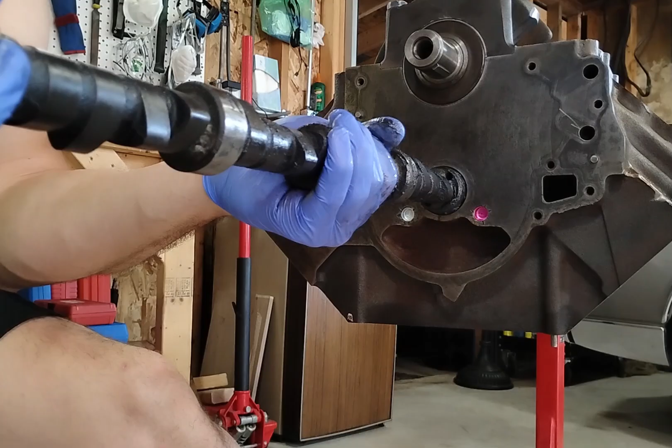In our last episode, episode 4, we battled some serious challenges just getting the camshaft installed. After plenty of finagling, we finally got it in. Now in this episode, we're hunting for true top dead center to figure out which of the 2 timing marks on our mystery Chinese damper is actually correct. And just wait until you see what we discover.

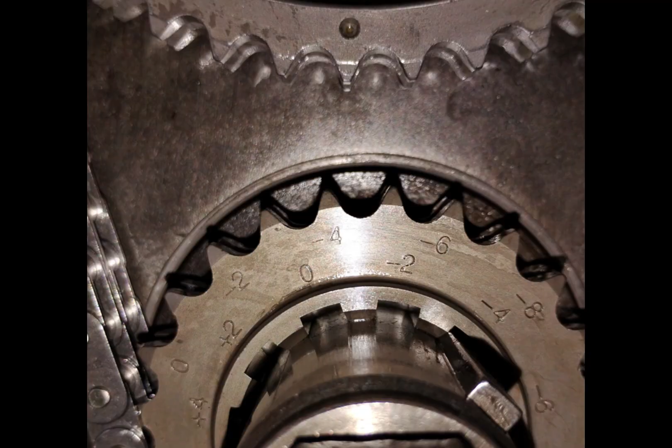From there, we move on to degreeing the camshaft, but the numbers we're getting are all over the place. Nothing wants to cooperate. And if that weren't enough, we run into yet another hurdle, figuring out the right pushrod type and length. It's unbelievable. So yes, the struggles continue. Stick with us to see how, and if, we manage to sort out this latest round of problems.

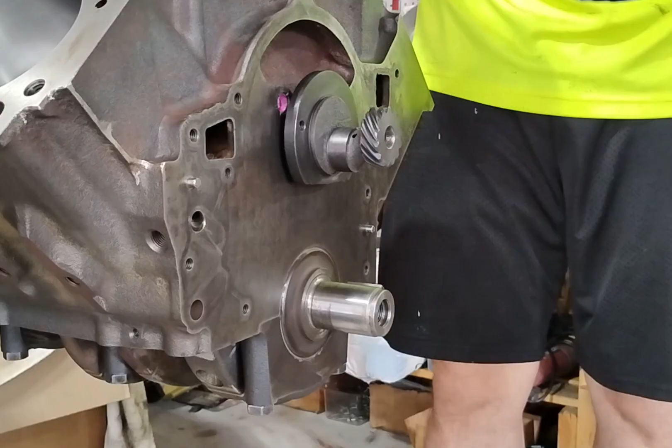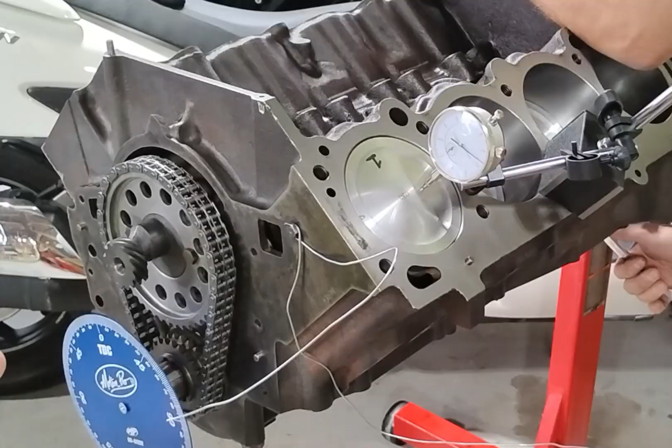We've got the crank, rods and pistons in, and the camshaft is in, so now it's time to install the timing chain set and degree the cam. The next step is to degree the cam. I'll be honest, despite building many engines over the years without a single issue, we've never actually done this process before. And there are plenty of great videos out there explaining the how-to of the process, so we're not going to get into technical details here. You can find those videos on your own, but we will tell you why you should care.

Given the fluctuating quality of modern parts, we were strongly encouraged to degree this cam, and it's a good thing we did. We purchased a timing chain set featuring multiple index positions specifically to dial everything in perfectly. However, when we started with the 0 offset position and measured the lift, the numbers didn't match the index marks on the crank pulley. Confused, we remeasured and got the same results. To make a long story not so long, we tried nearly every clocking position in this set. Even when we finally found a position that got us close, I still felt uneasy.

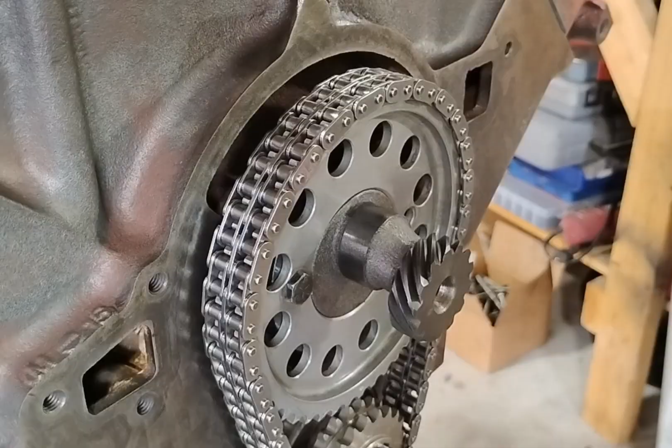So we called the supplier, TA Performance. Now they're not the manufacturer, they're the supplier. And we spent 45 minutes on the phone with a very helpful expert. And after reviewing our steps, he agreed we were doing everything right. The numbers just didn't make sense. Our conclusion? The parts were manufactured incorrectly. Had we simply lined up the dots and trusted the sprockets, we would have been screwed. The engine would have run terribly, and we would have been left scratching our heads as to why. So if you've never degreed a cam before, take it from us. With today's parts, you'd better start doing it.

Now that we got the camshaft dialed in, we're applying some Loctite primer to the threads in the cam, as well as the bolt threads that hold the cam sprocket on. I'm going to let that dry a little bit, then apply some red Loctite. We're also going to bias the cam gear in such a way so that if those bolts should ever loosen up, that cam gear is in the right spot anyway. But with the Loctite, nothing's going to move. That's a good practice to do.

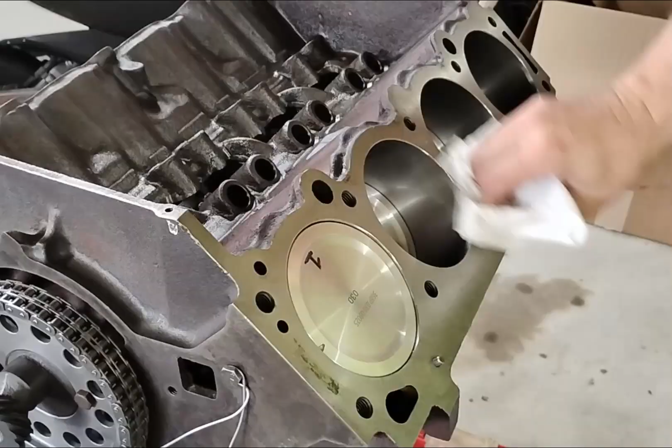So we're now cleaning the block in preparation for the cylinder heads. It's critical to strip away every trace of oil, grease, or old debris from the mating surfaces. A pristine surface is the only way to ensure the head gaskets achieve a permanent high-pressure seal. We follow the exact same process for the cylinder heads, double-checking the surfaces before carefully lowering the heads into position onto the block. Unlike many modern engines that use one-time stretch-to-yield fasteners, the original Buick 430 head bolts are reusable, provided they're in good condition.

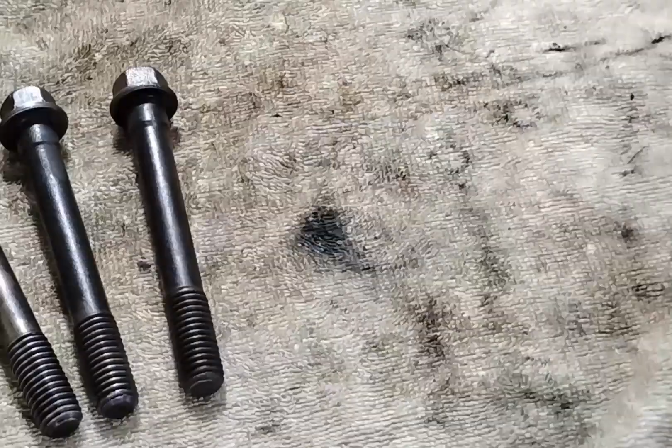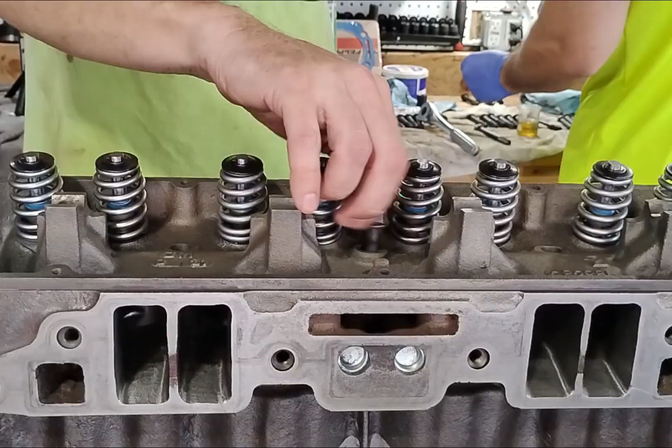We're using a wire wheel to strip away any corrosion and ensure the threads are pristine. This is a critical step because dirty or rusty threads will create friction that leads to false torque readings, which can compromise the clamping force and lead to head gasket failure. Apply a thin coating of engine oil to the head bolt threads to lubricate them, but don't slather it on because excess oil will drip off and get between the head and the block, and that will compromise the head gasket.

We're torquing down the heads in 3 steps following the tightening pattern described in our manual. Tightening in 3 steps prevents the head from distorting. The final torque we're using is 120 foot-pounds. So we started with about 50 foot-pounds, then went to 80, and then to the final 120, each time using the tightening sequence as described in the manual.

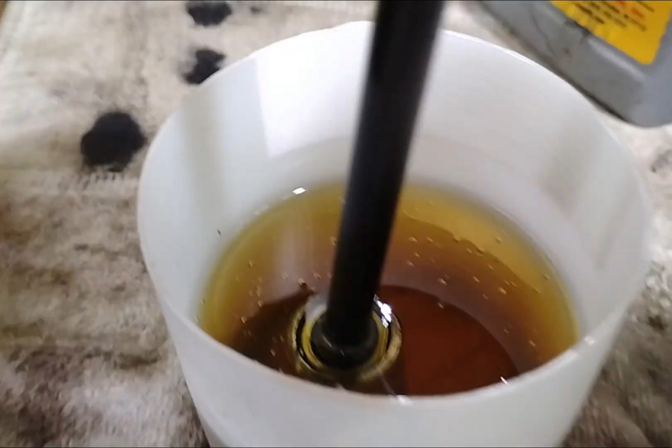Now that we have both cylinder heads bolted down and to the correct torque, we're going to now pump up our lifters. We are using hydraulic lifters. They need to be pumped up with oil prior to installing them because you don't want to start these up dry. Once they're primed up with oil, we're popping them in one at a time into the lifter bores. We're also going to make sure that the camshaft is lubed up again with some more moly because we want to make sure we have a good amount of lubrication for startup.

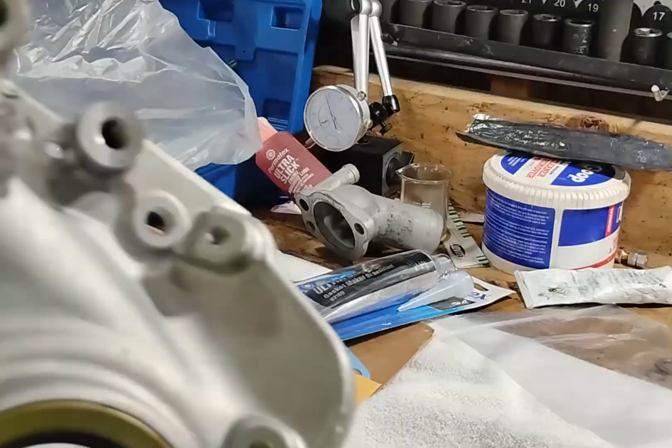So now we're cleaning the block in preparation for assembling the timing case. We want to make sure that the block is clean and free of any oil. Contaminants like oil can cause your gaskets to leak, so make sure you clean things really good. We're also applying some assembly lube to the timing chain and sprockets to make sure they have some lubricant on them for the first startup. We don't want moving parts dry during first startup. That is not good.

So we installed a new crank seal to the new timing case. And we're using a new timing case because this is a known weak area for these Buick engines. The oil pump is actually part of the timing cover, and since this is all aluminum, they tend to wear over time. Using a timing cover that is nearly 60 years old is risky, so we decided to replace it.

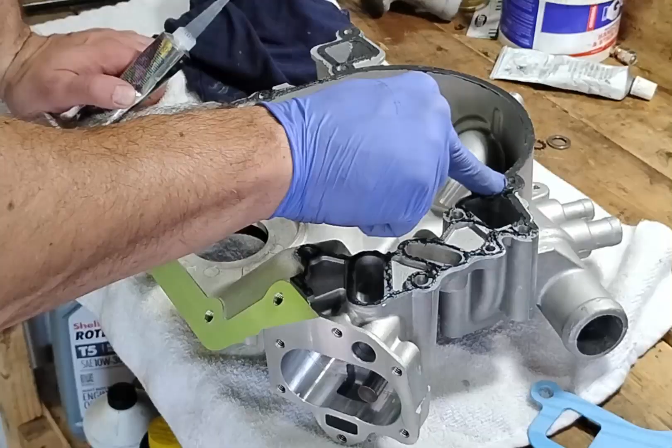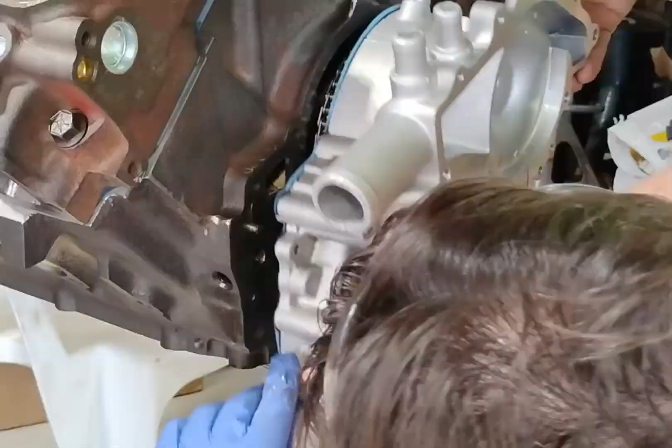We're cleaning off the gasket surfaces again to make sure they're clean, and we don't like relying 100% on the gasket for proper seal, although it probably would be fine. But we always put a thin layer of gasket maker where the gasket goes just to make sure things seal up good and tight. So before we put the timing cover on, we're going to lube up the eccentric on the camshaft where the fuel pump actuating rod or lever rides, as well as put a little bit of moly lube on the gear that drives the distributor.

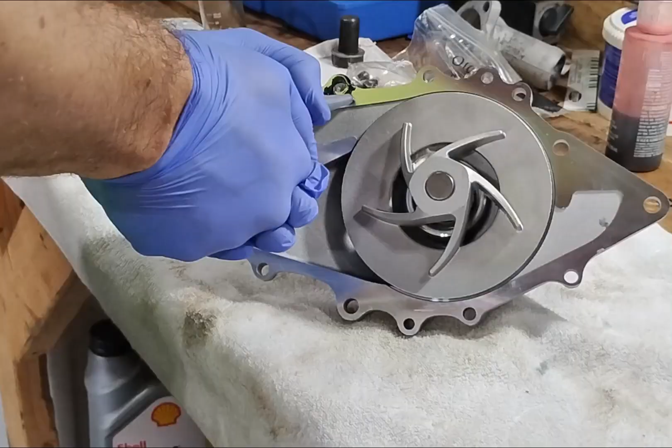Now we're torquing down the timing cover following the service manual pattern, and again we're using a stepped approach to torque everything down to their final values. Now that the timing cover is on, we're going to repeat the process of cleaning and applying gasket maker and gasket to the new water pump, and also torquing that down to its correct specifications in a stepped approach and following the recommended pattern for tightening as laid out in the manual.

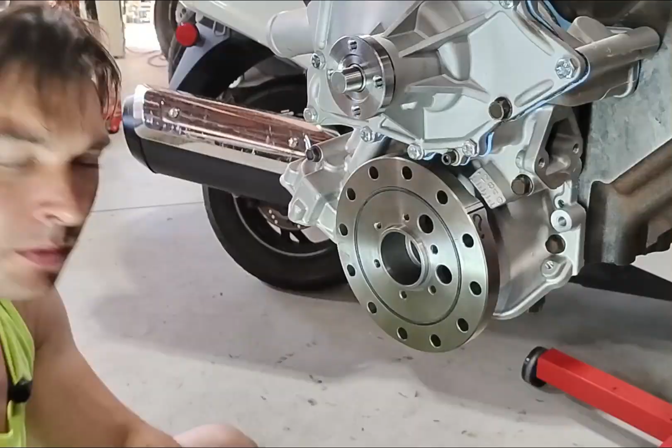Now it's time to put our damper on the crankshaft. We take out the bolt that we had been using to help us spin the crank during assembly processes, and we also put a little bit of lube on the ID of the damper, where it mates up with the crankshaft, to help things slide on, because these fits are typically very tight, very snug. You don't want that slopping around. And you also want to put a little bit of lube on the OD of the damper where it contacts the crankshaft seal. You don't want to install that dry. Could damage the seal. Everything works better with a little bit of lube.

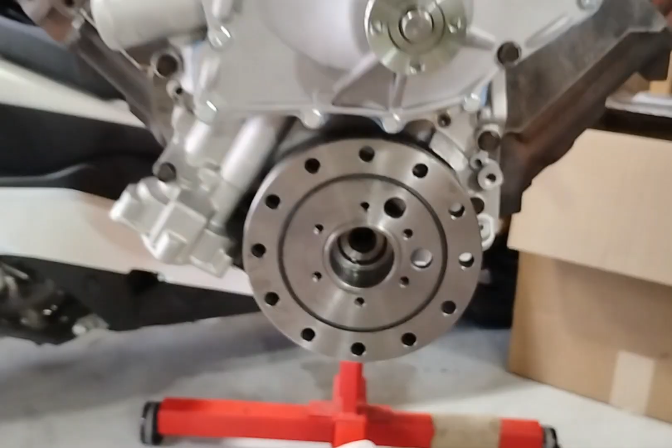We are ready to put on our harmonic balancer, and we're looking up the torque for that. Harmonic balancer to crankshaft, we are looking at 200 foot-pounds minimum. Yeah, that's quite a bit holding that puppy on. Luckily we got a torque wrench that goes up to 250. So we apply a little bit of engine oil to the threads of the crankshaft bolt that holds the damper on, to make sure it's lubricated properly. Again, if it's dry, you may get false torque readings, so it's always good to have a little bit of lube on there.

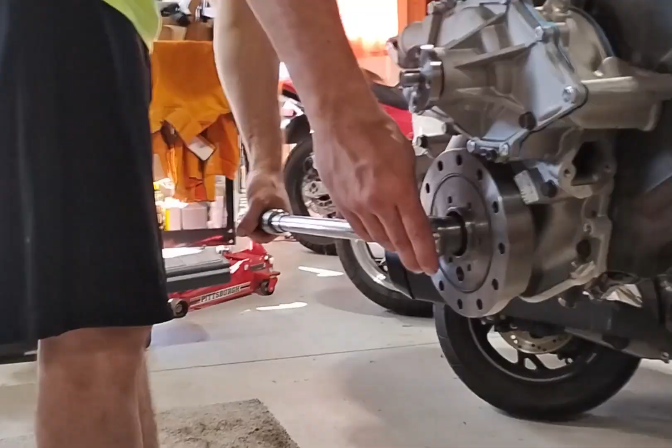Now we're getting ready to torque the damper on, but I'm not happy with pushing down on the torque wrench. That engine is really heavy, and now we're going to be pushing another couple 100 pounds down on top of that. So I said, you know what, let's switch it around. Let's go around the other way and lift on it. That way we don't risk dropping the engine.

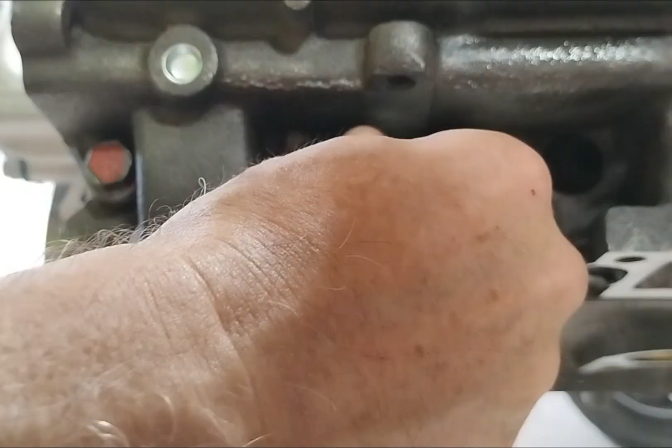Now we're getting ready to find true top dead center for our number one piston. To do this, you use a tool called the top dead center piston stop. It's a simple mechanical tool designed to physically block a piston's upward travel so you can find the exact center of its stroke. It's essentially a hollowed out spark plug with a long bolt or rod running through the center. Most are made of steel or aluminum, this one's brass, and some use plastic tips to prevent scratching the piston head. This is the most common type for amateur mechanics. It threads directly into the spark plug hole of your number one cylinder. There are other types, but this one will do just fine.

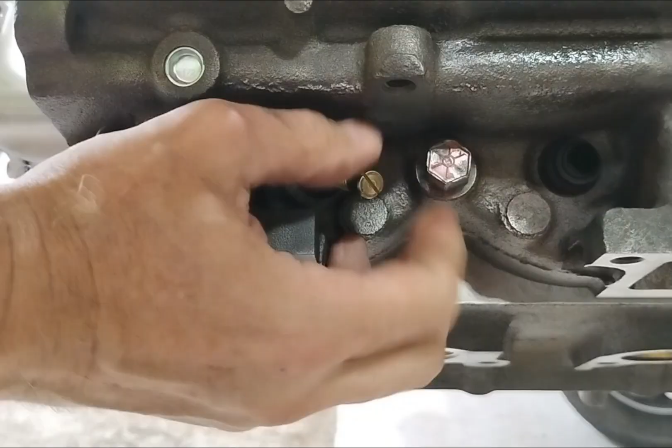Because we can't see the actual tops of the pistons because the cylinder heads are on, what we're also going to do to make sure we got things right is check cylinder number 6, because when piston number 1 is at top dead center, piston 6 on this engine is also at top dead center. It's not the same point in the combustion cycle, but that's okay, that doesn't matter.

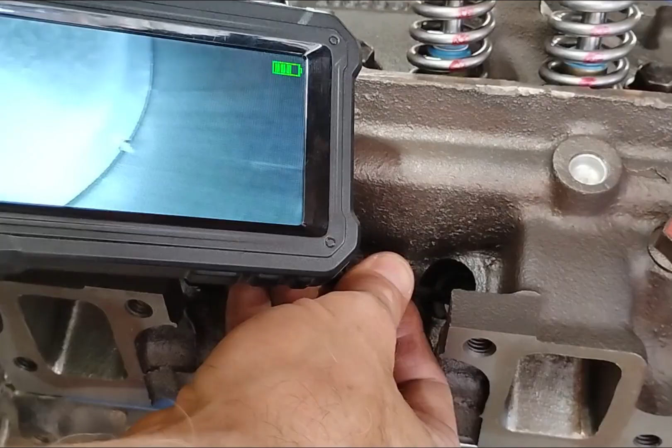So what we're doing is we're taking our endoscope here, which is basically a camera with a flexible mount at the end so you can put it down into small tight areas and see what's happening. And we're going to watch for the top of the piston to come up near the top, and that will tell us that we're close to top dead center, which will also be top dead center for number 1. Then we'll rely on our top dead center tool for exact measurements.

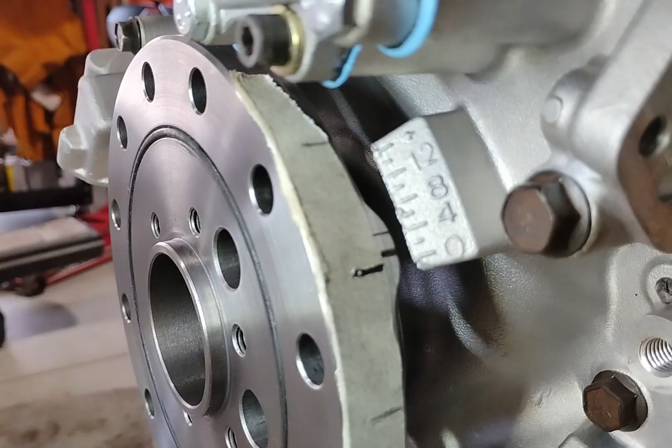So here we are, we got the harmonic damper put on. I want you to pay attention to what we're seeing here. This mark here is one of the engravings on the harmonic damper from the factory. It's deeper and thicker than this mark. That is another mark on the harmonic balancer from the factory. So there were 2 marks.

As our machinist pointed out in our episode 2, he saw this on the damper and said he doesn't know which one's right. And there's no way to tell until you get the damper on the motor. So it turns out neither of them is correct. What we had to do was get a piston stop for number 1, and this mark here and this mark down here are the extremes of the piston travel. So halfway between those is this mark. That is true top dead center.

And we have it now lined up with the 0 on our timing case cover, so we know that is correct. What we're going to do is take this masking tape off of here. We have a degree timing sticker coming in for this balancer, and we'll put that on. But in the meantime, we've put a little bit of a dimple in there with a sharp punch, as well as on the face, so that we don't lose this mark anymore.

But this really stresses the importance of you cannot trust parts anymore, even from what was maybe a reputable company in the past. If things are made overseas, sorry, China, but you know, this is what you get. It's not right. You have to double check everything. This could have caused us some major problems had we just assumed everything was correct. So be forewarned.

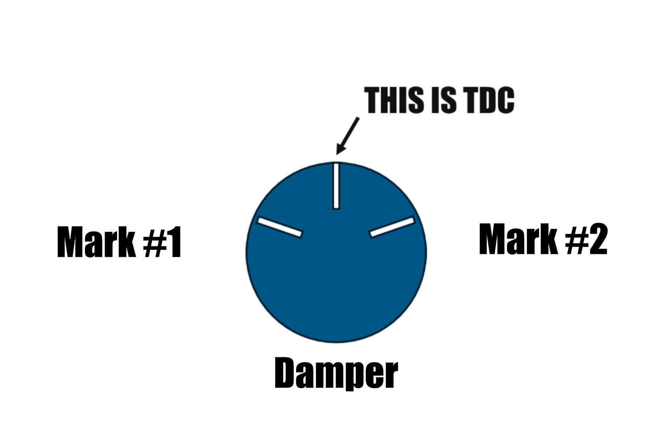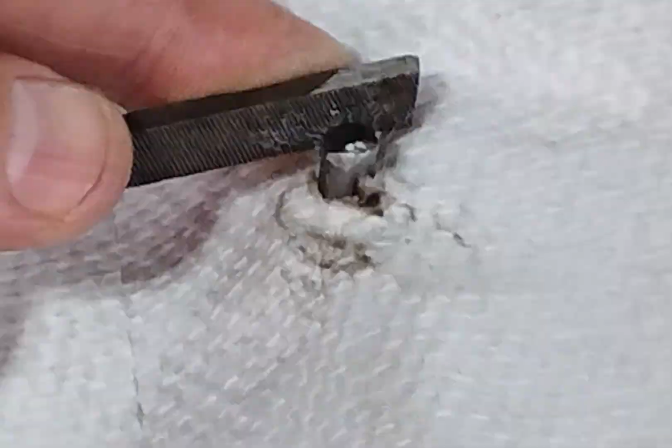So what we're going to do is clean that off. We're going to obviously protect the engine from filings getting into the valley pan. But we're going to file that down, make sure it's round, smooth, the right diameter. Otherwise, the intake manifold won't go on.

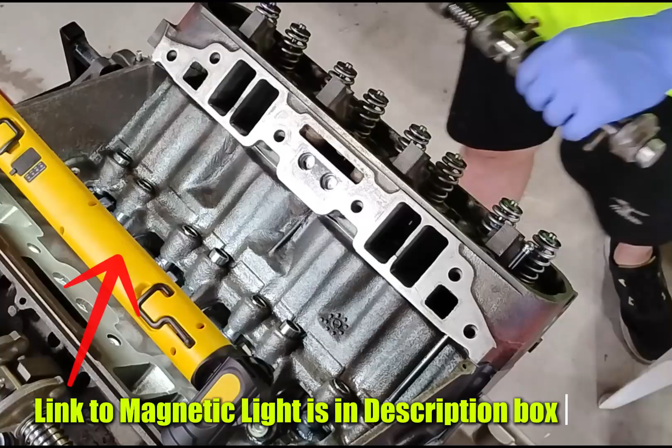To determine the correct pushrod length, you'll need an adjustable pushrod tool like this one from T8 Performance. This tool features a threaded body that allows you to precisely dial in the length. What you want to do is set the camshaft, so rotate the engine until the camshaft is on its base circle, fully closed, for the specific valve you're measuring. Place the adjustable pushrod into the block, ensuring it is seated correctly into the lifter.

Assemble the rocker arm assembly over the pushrod and torque the mounting bolts to factory specs. Lengthen the tool or shorten it until all vertical up and down play is eliminated between the lifter and the rocker arm. You have now reached 0 lash, when you can still rotate the pushrod with your fingers and feel a slight drag, but there's absolutely no vertical movement.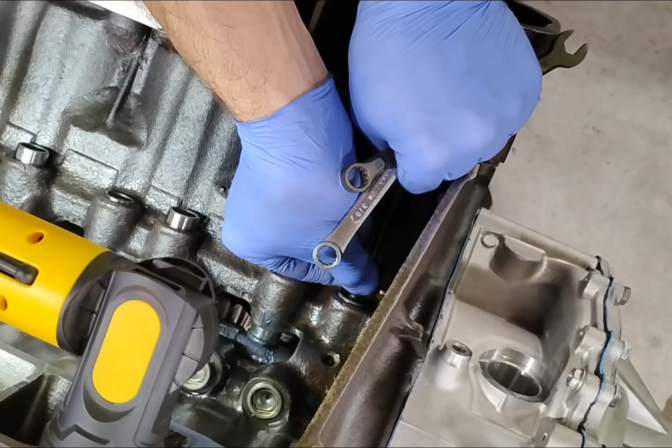Carefully tighten the jam nuts on the tool, but be careful, the threaded ends often want to spin as you tighten them. If the length shifts even slightly, you must start the process over to ensure accuracy. Carefully disassemble the rocker arm and retrieve the pushrod. Then measure its total length with a high-quality caliper. Document the exact measurement for that specific valve.

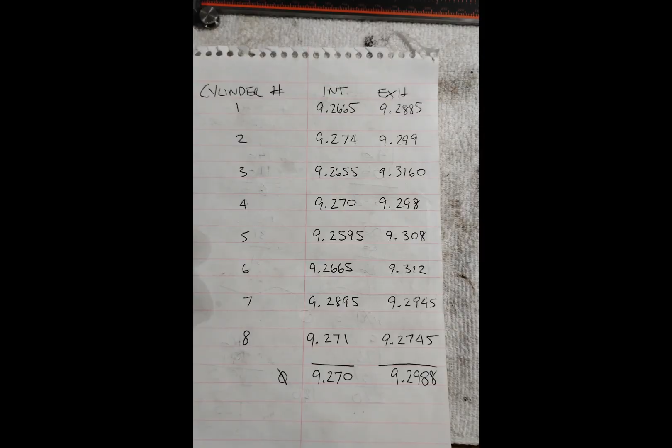Because Buick valvetrains can vary slightly across different cylinders, keeping meticulous records is vital in order to avoid mixing up your numbers. Due to the machine work, altering the height of the deck and the heads and a new camshaft, we can't use the stock pushrods. So we measured what lengths we need, and over here on this chart, we have our intake and our exhaust. What the pushrod length is at 0 lash, and we're targeting 40 thousandths to 60 thousandths preload.

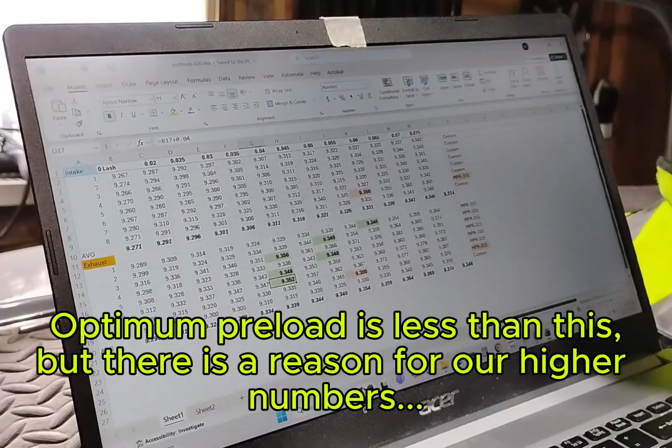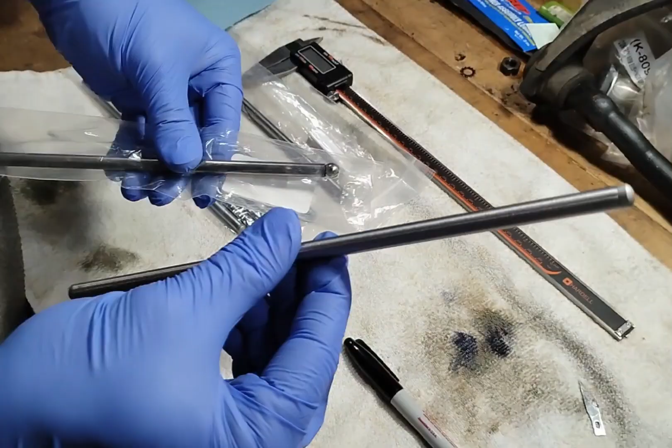And we needed custom length pushrods for almost all the intakes and one of the exhaust, and found some Melling pushrods that would work with the rest of them. Now if we look over here, they look a little bit different, but these are the custom length ones. These are the Melling ones I got off of Summit.

Explain some of the challenges we had with online data. Yeah, the measurements weren't quite right. And when it comes to pushrods, 3/8 and 5/16 sometimes is not 3/8 and 5/16 in terms of diameter and ball end tip. I had to take a few back. It's easiest if you just stick to a stock rebuild and a stock cam, but you can't really do that. You have to measure to make sure these are the proper length, and don't trust what they say, even from the manufacturer. On some sites, it was all wrong measurements, wrong length. So yeah, wrong ball diameters, everything is suspect. You have to double check everything yourself.

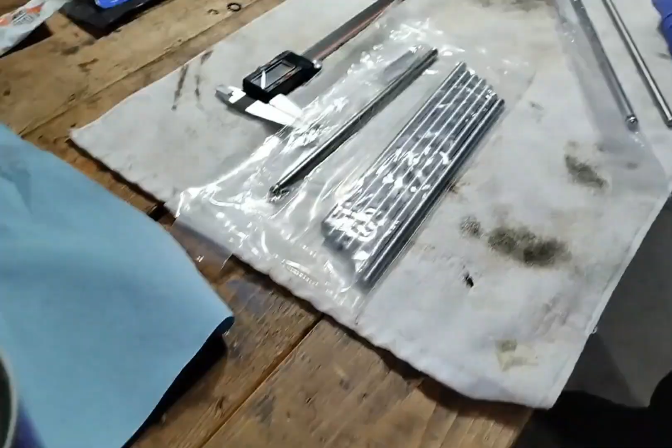For the 430, it oils differently than the 455. And we need non-oiling pushrods because the 430 accomplishes its oiling through passages in the block and into the head that pressurizes the rocker shaft and then drips down to the lifter. The 455 is different. And I did not want to use a hybrid adjustable pushrod. I'd rather use a one-piece. So this is what we've got to work with here. So let's get measuring and see if these will work, and we can finally button up the top end of the valve train.

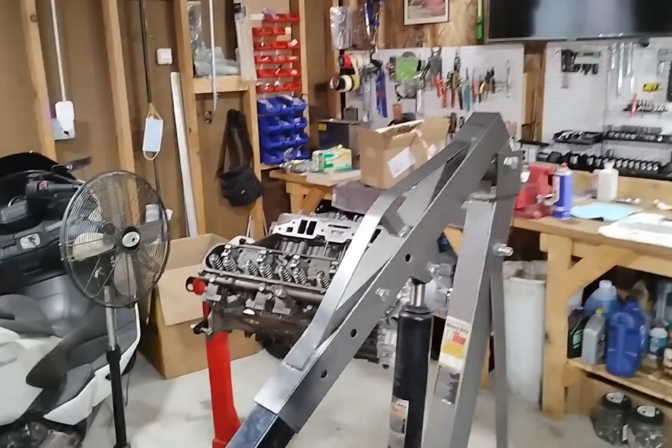So I guess to summarize, because of the differences in the heights of all these pushrod lengths, we were not able to utilize one stock length, right? We have several lengths that we had to use just because, again, there's Chevy valves in these heads. They open up the breathing a bit more. And we're just not entirely sure if perhaps the valves are not all seated consistently height-wise, where the machining, where the seats are. We just don't really understand where the discrepancies are coming from, other than there are some.

So we had to do a little bit of, actually quite a lot of research on lifter lash, lifter plunger travel. We tried to use AI tools to help us out, but that didn't work too good. We had to really come up with our own numbers. And yes, we know 20 to 30 is the ideal lash, but in this case, we have to go with something a little bit bigger. Turns out the lash on these, or I should say the piston plunger travel on these lifters is 120 thousandths. Is that right? I believe that's correct.

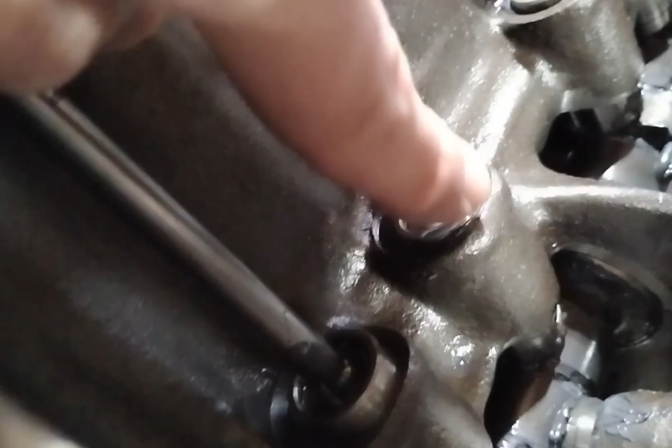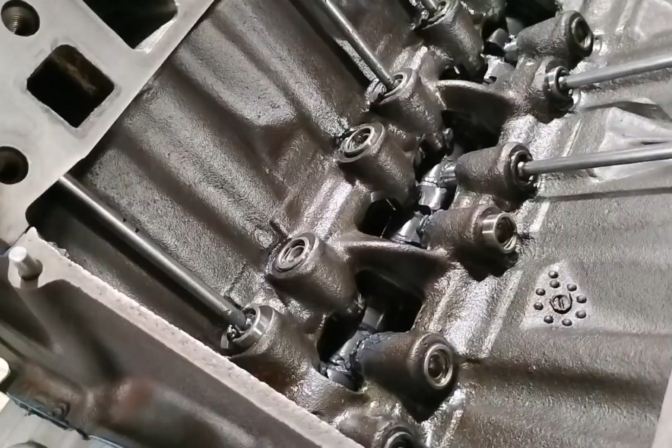So from the point where that lifter is fully up against its retaining clip, pushed all the way down, those plungers travel 120 thousandths. We wanted to stay away from the very top of the plunger travel and the very bottom of the plunger travel. So that's why we focused on the lash settings that we did. That gives us quite a bit of clearance at the bottom and quite a bit of clearance at the top, and it helped us reduce the number of custom pushrod lengths required. So this is the best scenario we could come up with, and we're confident it will work.

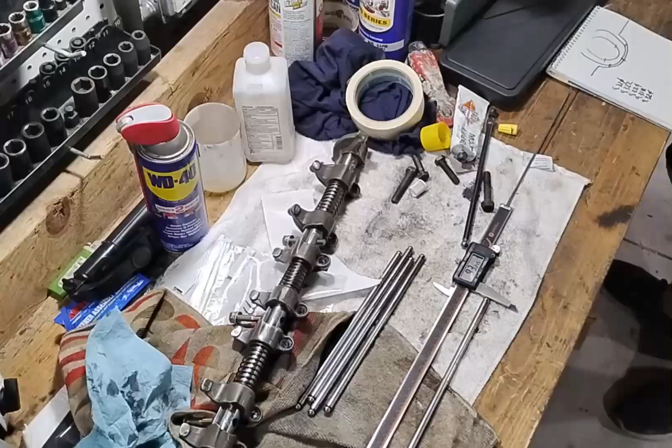So now we're measuring all the pushrod lengths that we got. And remember, there's a variety of different lengths for the situations that we have here. So we want to make sure, first of all, that they're correct, that they're what we ordered.

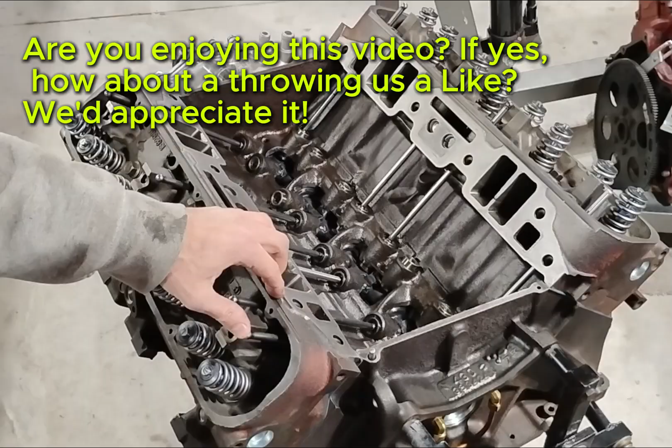And if they are, we're going to write down the exact length on those pushrods, and then compare that to the spreadsheet that we have, which shows which length pushrod needs to go in which position. In other words, pushrod number 1 may have to be the exhaust valve for cylinder number 3. That's how specific things have gotten in this particular engine build. But, you know, that's what we got to do. So, again, we're being very careful about how we're doing this, and we're making sure that we're getting the right pushrod in the right location.

Once we have all the pushrods in their right places, we are putting on the rocker arm shaft assemblies for both sides, lubing up everything again as we go, and torquing them down to factory specs.

Once the rocker arms are on, we want to give the engine a rotation or two, make sure everything feels good, there's no binding. We double check each of the pushrods to make sure there's nothing loose and flopping around. And again, don't forget to take that top dead center piston stop out before you do any kind of engine rotation.

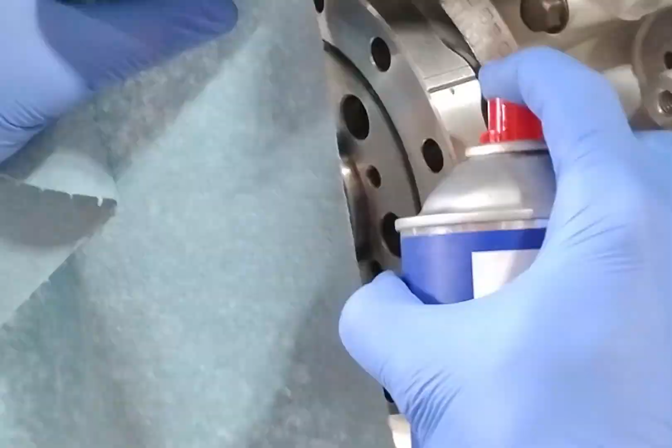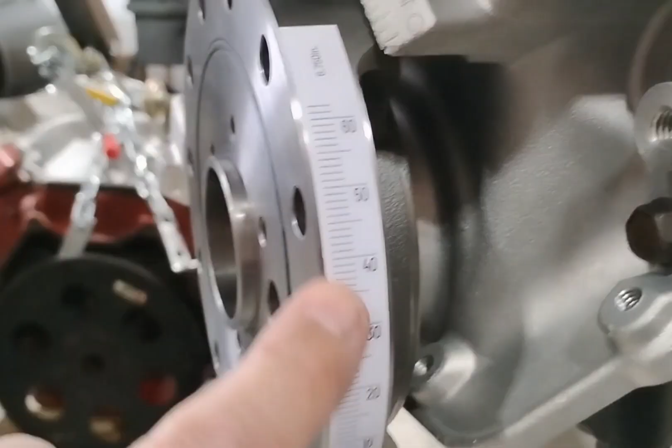Now we're going to take off our temporary masking tape, which helped us determine top dead center, and clean off that damper nice and clean and put our beautiful new degree sticker on there. We want to make sure that we line up the 0 ticker on that tape to the punch mark that we made on the damper. Very good. So our new sticker's on there now. We got all sorts of markings on here. We'll be able to time this thing no problem. And we got the true 0 mark lined up with our dot. Perfect. Feel much better about that.

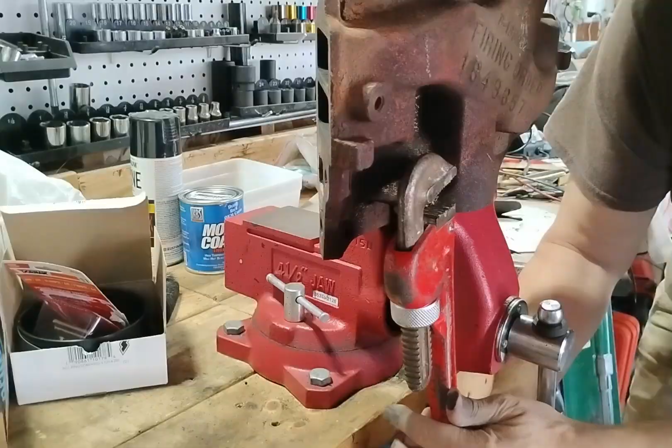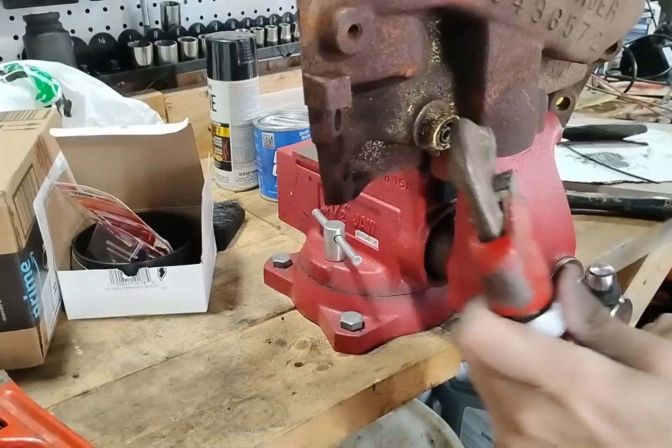So, as is often the case with old cars, parts that have been joined together years or decades ago sometimes like to become one with each other, and they get seized in there pretty good. So here we are with our stock intake manifold, and there's a water temp sensor that just will not come out. We've struggled with this thing, we've tried heating it up, tried a pipe wrench on there, because the sensor itself is brass, it's very soft. The tool that goes on there just mangled it. Vice grips, you name it, it just wouldn't come off.

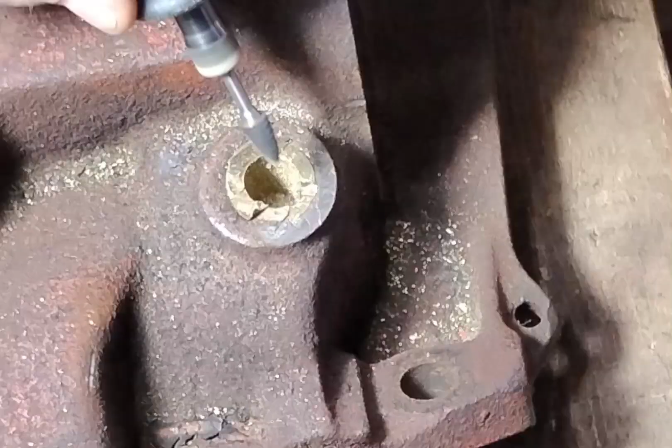So we had to eventually just cut the thing off and use a Dremel tool to carefully grind away the ID of the sensor, and that way we could collapse it a little bit and break it free and get it out of the manifold.

Here I am doing something a little bit dangerous. I don't have any gloves on. I'm old school. I just don't wear gloves. I feel they're a pain in the neck and they just get in my way all the time. But I suffer the consequences quite often. I cut myself all the time. My son actually makes fun of me. He says, "Hey, let's see if that's sharp. Dad, run your finger across that and see if you get cut." Because I do that. So just be careful when you do this kind of stuff. Don't do what I'm doing here. Wear some gloves or be careful because you could easily get cut on this sharp stuff.

Alright folks, well I finally got that stubborn sensor out of the intake manifold, but when I was using the Dremel tool, I did exactly what I didn't want to do. As you can see here, right there, I dug into the threads of the manifold. Great job. I think it'll be okay still. We'll put some gasket maker, Ultra Gasket Black, in there that's supposedly good for coolant and pressure, high temp situations. I think we'll be okay because we really want to use this manifold over again. But I tell you folks, don't get old because your eyesight, man, whatever.

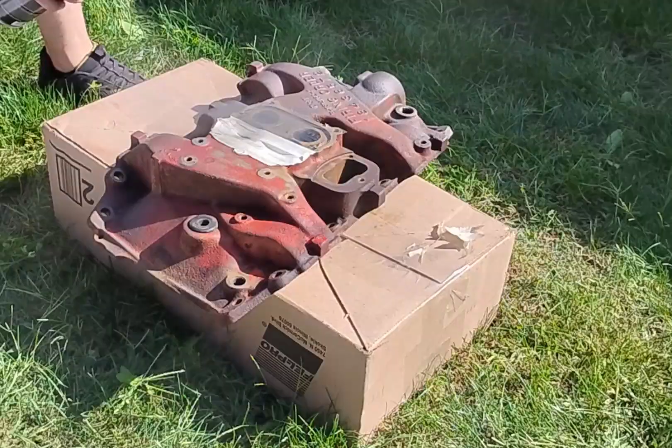So we've cleaned off the intake manifold. We've sanded off all the loose rust, flaky old paint, cleaned it up real good, degreased it. Now we're giving it a few coats of that gray cast iron look, which is good for high temps.

Now we're getting ready to put the intake manifold on. And as before, anytime you have a gasket surface or a joining surface between parts, always clean it off really good with a good quality cleaner. Make sure you don't leave any lint behind, because it's important for the gaskets to have a clean surface in order to seal properly.

And I don't know about all you folks, but man, I tell you, I can't tell you how many intake manifold leaks I've had in the past. Of course, that was on old Cadillac engines, 472s and 500s, but man, those things with the steel valley pans, they just did not like sealing up properly. So this has a nice set of gaskets. Hopefully we don't have an intake manifold problem with this one.

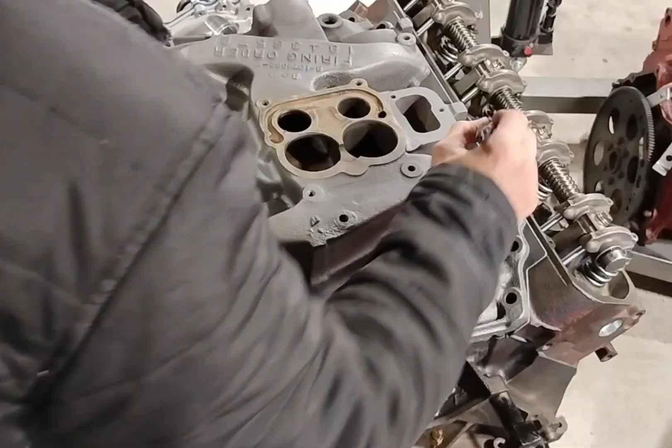Very important to use a good quality gasket sealer in those four corners where the intake manifold rests on those two rubber strips. Those two rubber strips there, each end, it's very important to put a good little glob of gasket sealer underneath those strips and on top of those strips so that those corners seal up when that manifold is in place.

Now I'm marking the intake manifold gaskets with the sequential number of how the bolts should be tightened. Again, there's a pattern to this, and you need to follow that pattern to prevent distortion and warping, which will cause intake manifold leaks. Also, we're going to torque these bolts down in a stepped sequence as well to their final torque.

Time to put the thermostat housing on the intake manifold.

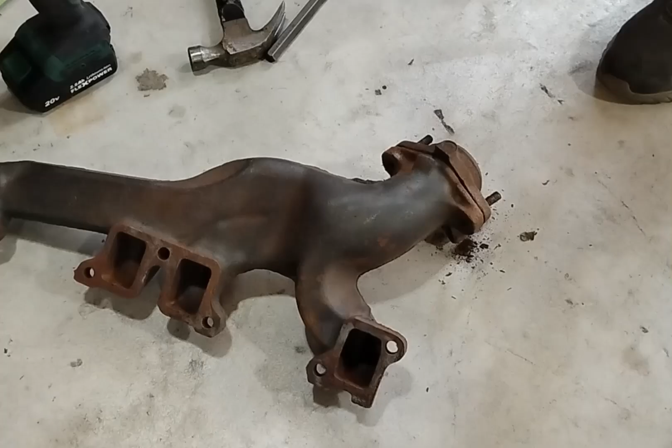So the exhaust manifolds on this Buick are actually kind of interesting. You might hear about when Buick enthusiasts speak of pseudo headers on the 430 Big Block, which was produced from '67 to '69. What they're doing is referring to the factory cast iron exhaust manifolds, which were remarkably advanced for their time. Unlike the restrictive log-style manifolds found on many other engines of the era, Buick's engineers designed these to mimic the flow characteristics of a tuned header, while maintaining the durability and quiet operation of cast iron.

The 430 engine and its sibling, the 400, was part of a $50 million engine redesign to replace the aging nailhead engine from the years before. The exhaust manifolds were a focal point of this performance-oriented engineering. The runners have a swept-back shape that curves towards the collector. This design reduces back pressure and utilizes the scavenging effect, where the exit of one exhaust pulse helps pull the next one out, similar to how a tubular header functions.

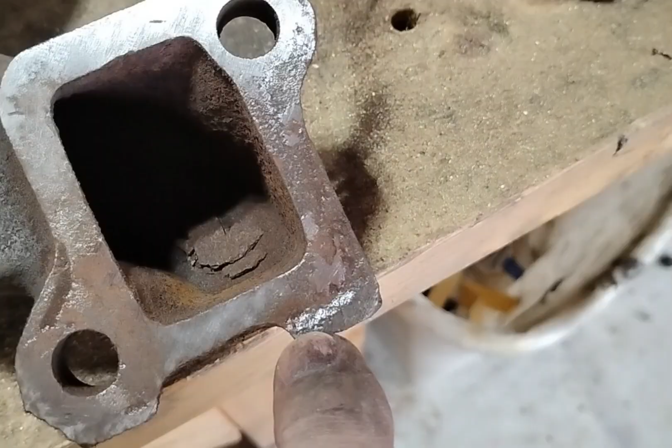The exit points where the runners meet were significantly larger and more streamlined than those of Chevrolet or Oldsmobile engines of the same displacement. Now, as you can see, these headers are obviously pretty old, and they're rusted at the interface surface between them and the cylinder heads. Some of the areas are pitted pretty deeply, and that's causing us a little bit of concern. We suspect that there's going to be some exhaust manifold leaks there. So what we're going to do is clean off and remove all this scaling and rusting and pitting, try to clean that off as good as we can.

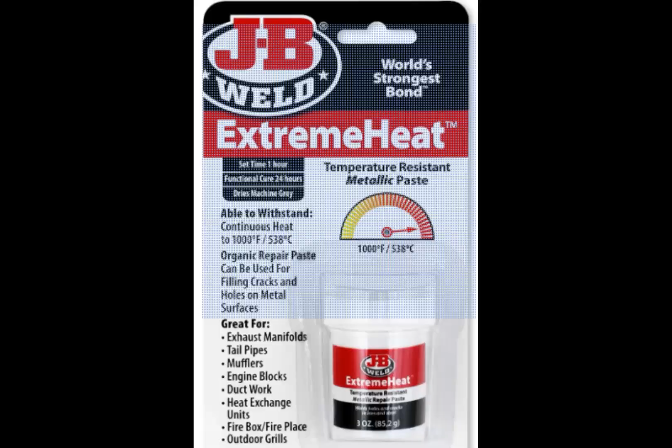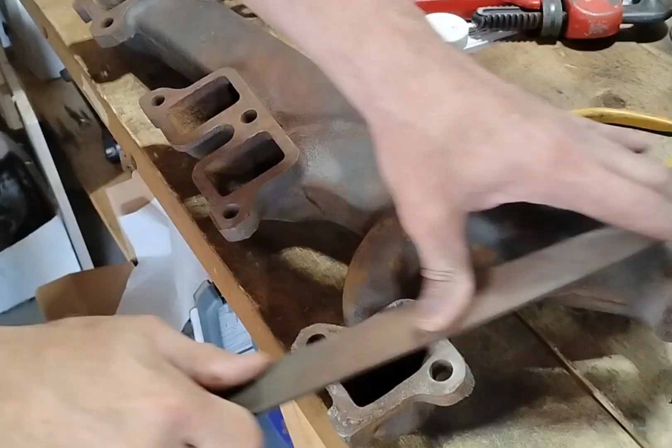What we're going to do is use a JB Weld product called Extreme Heat Epoxy. What we're planning on doing is filling in these voids and deep recesses with the epoxy, then filing the surface flat and smooth again so that there's no areas for exhaust gases to leak out. We hope that'll work. This product is supposed to be rated up to 1,000 degrees Fahrenheit. It's possible that exhaust gases can reach higher than that, but that's usually when you're really stepping on the thing. And we don't plan to do that with this car because it's going to be a stock silent beauty.

Hopefully this will work. Because these pseudo headers flow so well, many Buick owners choose to keep them even when modified. On a stock or mildly built 430, switching to aftermarket long tube headers typically yields only a gain of 10 to 15 horsepower, which many enthusiasts feel isn't worth the trade-off in heat, noise, and constant bolt tightening. So if you're lucky enough to have a set of these, hang on to them because they perform really well, they're stock, and they're a great alternative to tubular headers.

So now that the manifolds are clean and prepped, I was ready to put the JB Weld Extreme Heat product onto those pitted surfaces. I had this jar laying around for a while, not sure how long. It was brand new, still sealed, as you can see, but as soon as I opened it, I could tell something was not quite right. It was very watery looking on top, and I've used this in the past, and it didn't look like that before. And when I started mixing it up, I thought, feels very hard, very clumpy.

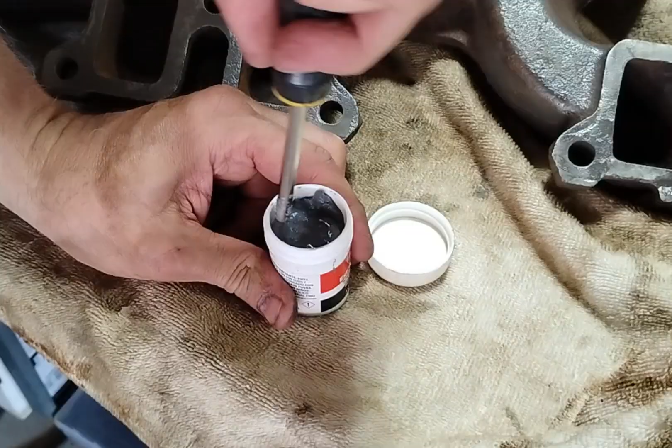Didn't feel right, and no matter how long I mixed it, it just wouldn't get to the right consistency. It felt like wet sand. It's supposed to be a thick paste, so it didn't work out. It must have been laying around for too long, so I decided, you know what, I'm just going to chuck this. I'll order a new jar, and I'll keep working on it until that gets in.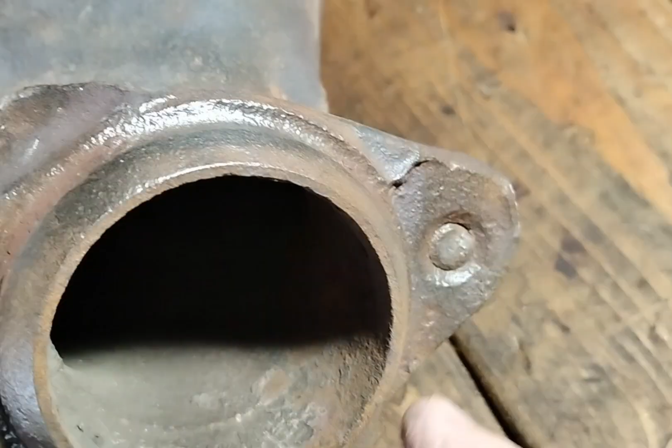And as is typically the case with exhaust manifolds this old, the studs have broken off, and you can't get them out. So we're going to have to go through the painful process of drilling them out and retapping these threads. So we finally got the broken studs out and rechased those threads. We're ready for new studs, and now our new JB Weld Extreme Heat has shown up, and we'll apply that to the exhaust manifold pitted areas.

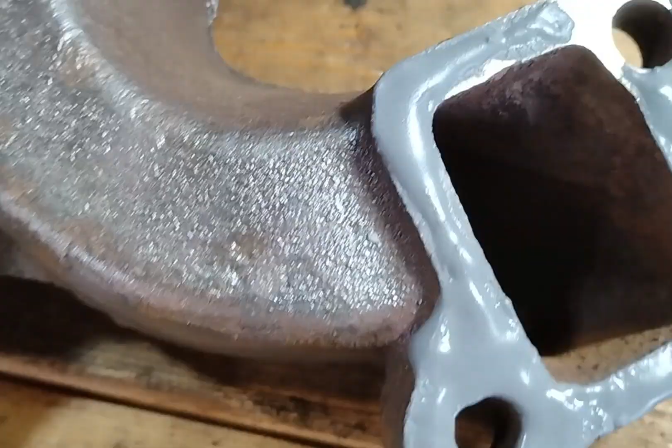Okay, so we got the flanged surfaces of the exhaust manifolds covered in the JB Weld Extreme Heat. We'll let that dry, and then we'll file it down carefully, smoothly, so that we got some nice, smooth, flush surfaces with the divots, pockets, and any missing material filled in. I think that will work just fine.

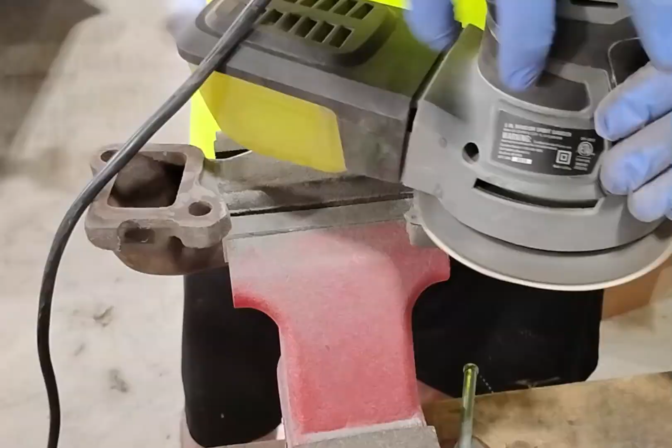Another reason we're filling in these low spots and divots is because these exhaust manifolds are intended to be used without gaskets. It's basically metal on metal to the head. I don't really like that. I know that's stock, but I'm very used to having gaskets in there. And with the fact that there's low areas, I think gaskets would help seal this up.

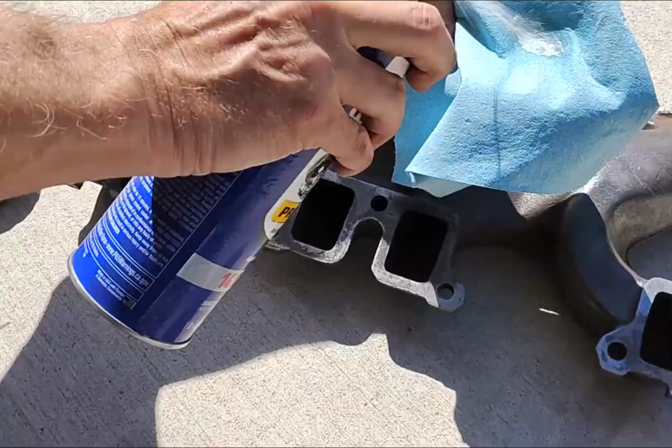Once the JB Weld Extreme Heat had a sufficient amount of time to cure and dry rock hard, we carefully sanded off the excess, blending the original surface of the exhaust manifold with the Extreme Heat so that we had one nice continuous surface. We didn't take off any metal, or hardly any metal, on the exhaust manifold. We just wanted to knock down the high spots on the Extreme Heat so that it would match up with the original surface of the exhaust mating surfaces.

With the exhaust manifolds prepped and cleaned, we're applying a high temperature paint that creates the authentic look of fresh cast iron. It's a great color for this project and holds up perfectly to the heat.

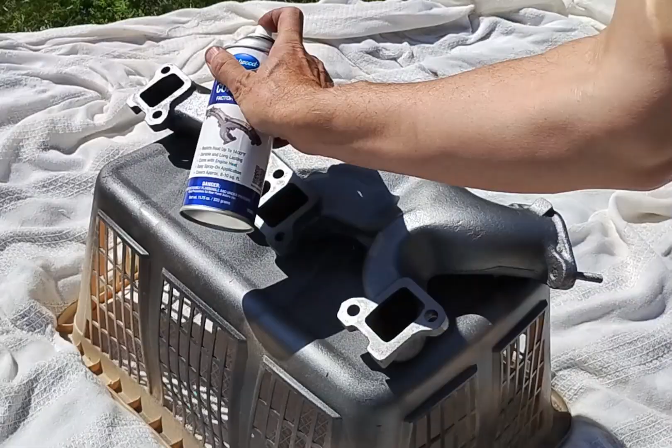Now the manifolds are painted and cured, it's time to put them on. Again, we're using gaskets even though the stock situation calls for none. Not a fan of that, so we're going to use some gaskets here to help take up any voids or pits or anything that might be left over from our JB Weld experiment here.

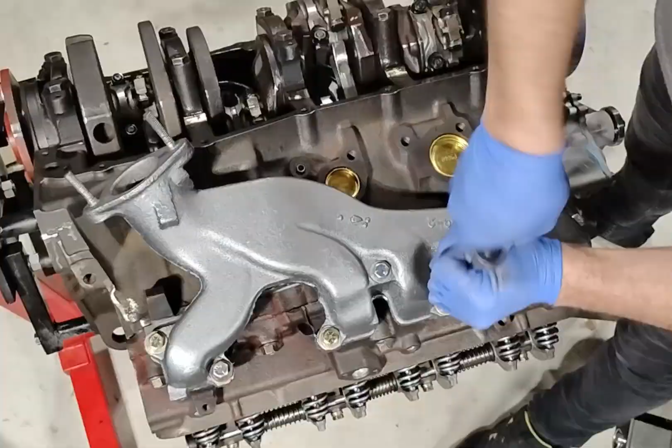But we got to be careful when we torque these things down. These are cast iron manifolds, which means they're very brittle. Don't want to go crazy torquing these guys down because the gasket material is compliant, it's pretty soft. We don't want to impart any excessive loads to the ears of those manifolds because they could crack, breaking off, which is not a good situation. We don't want that to happen at all. So we're going to be very careful about tightening these things down.

Also, you'll see that we ran into a little bit of trouble with some of the mating threads for the exhaust manifold bolts. They were a little bit dirty, a little bit chewed up. Some crud down in there. We had to chase a couple of those holes with some taps of the right size. Again, make sure you don't get any of that debris falling into the engine. That's a bad situation. So we cleaned out those threads and then the bolts went in just fine.

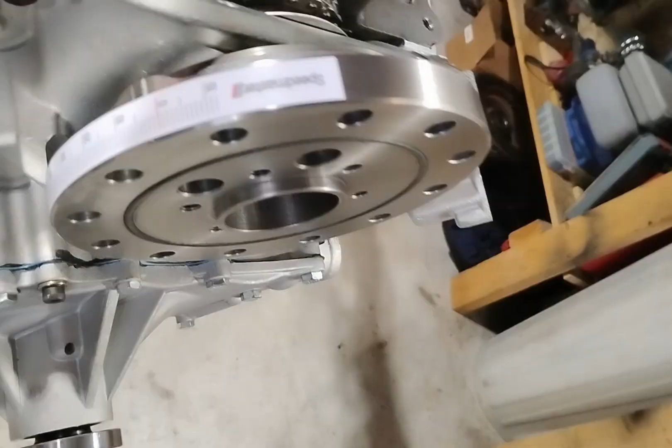Well, we've made some great progress in this episode. The heads are torqued, the cam is degreed, and the manifolds and timing cover buttoned up. This build is finally looking like an engine. We also locked in top dead center, and everything is primed for the oil system and a fresh coat of paint in our next episode. But, as has been the case with this build, we ran into yet another hurdle, an oil pan with bolt holes that just wouldn't line up. We thought that frustration would be our biggest problem, but then the unthinkable happened.

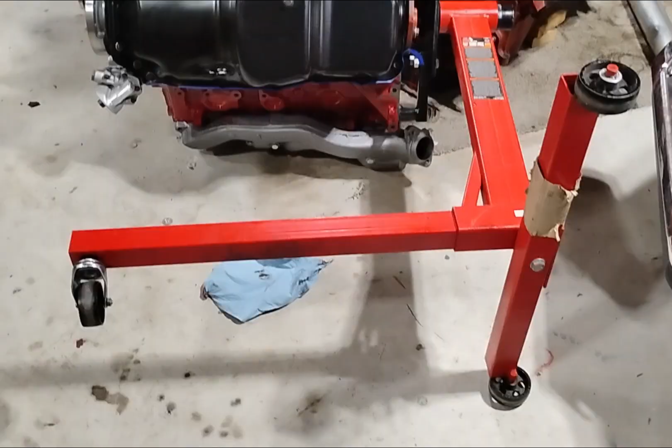Alright, folks, slight catastrophe here. Nobody got hurt, but look what happened here. This engine just tipped when we rotated it to paint it. It hit the floor pretty hard. We hope we haven't damaged anything. Hopefully the heads are okay. I'm seeing a piece already right there. Really? Good God. Alright, well, we're going to have to get the hoist out. We're going to have to lift this puppy up and see what the hell's going on.

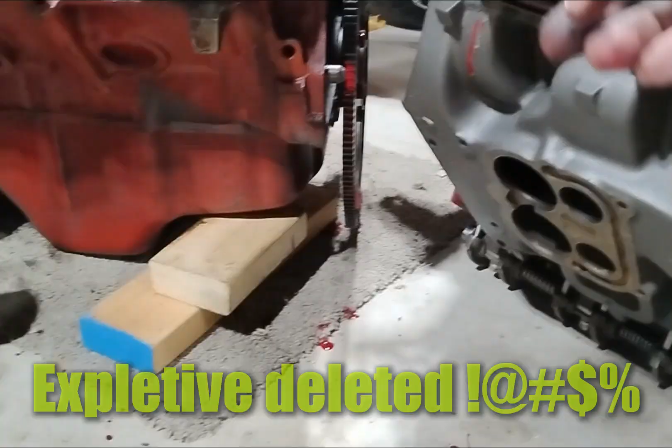What is that? What do you think that is? Well, it looks cast iron. I don't know. And, of course, paint in the valve train. Oh, man. My God. Well, there's obviously cracked parts. Who knows what happened here? Is the block cracked? Did we lose the crank? What else? It's sitting on the rocker arms, so that ain't good.

We really don't know if there's going to be a next episode anymore. This project has been one challenge after the other. This could be the breaking point.